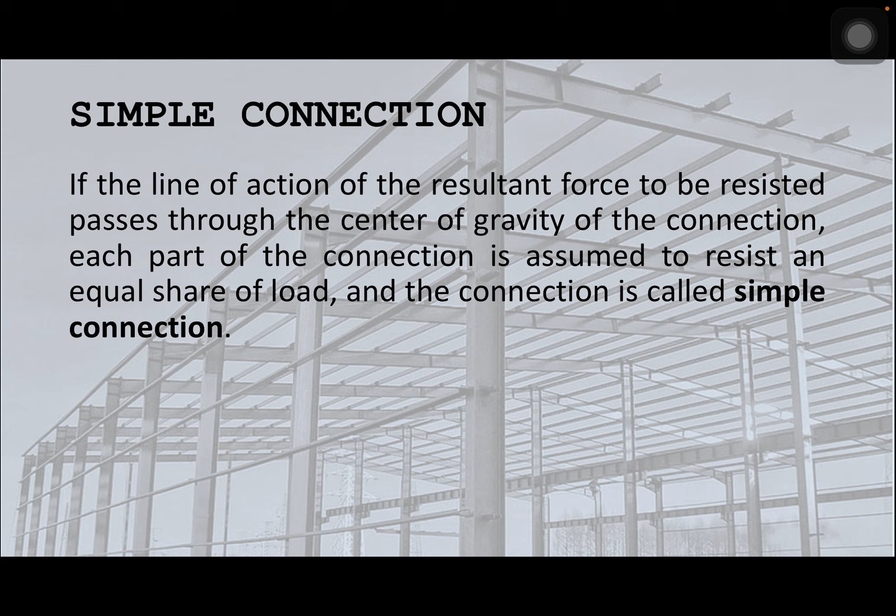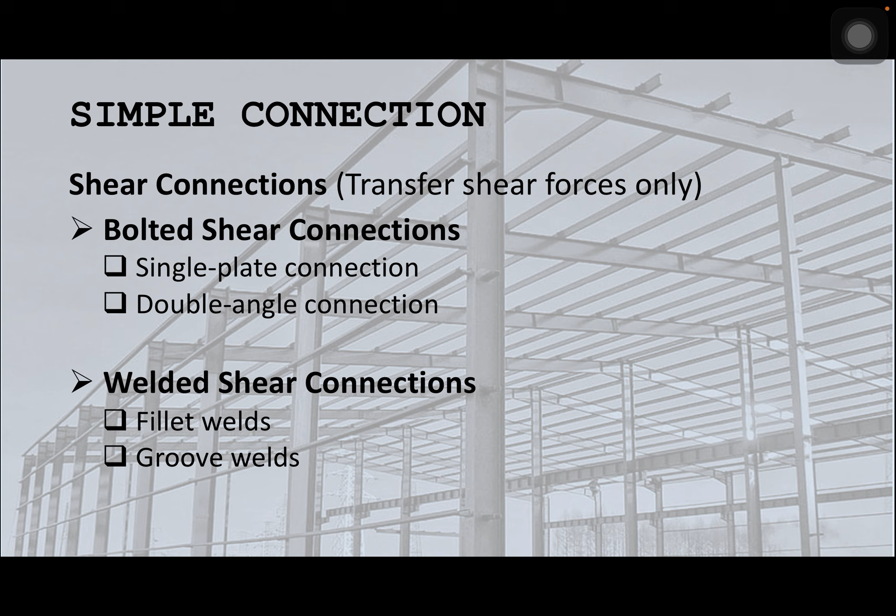Sabi ko nga sa inyo, those connections are the bolted and the welded. For the bolted shear connections, we have the single plate connection. We also have the double angle connection. Then for the welded shear connections, we have the fillet welds and then the groove welds. So ano ba yung tinatawag natin ngayong welding? Welding is a permanent method of joining steel members by melting and fusing them together using heat.

Unlike bolted connections, welded joints eliminate the need for bolts and plates, providing continuous load transfer and high strength. So ito yung common na ginagamit natin for connecting structural steel materials.

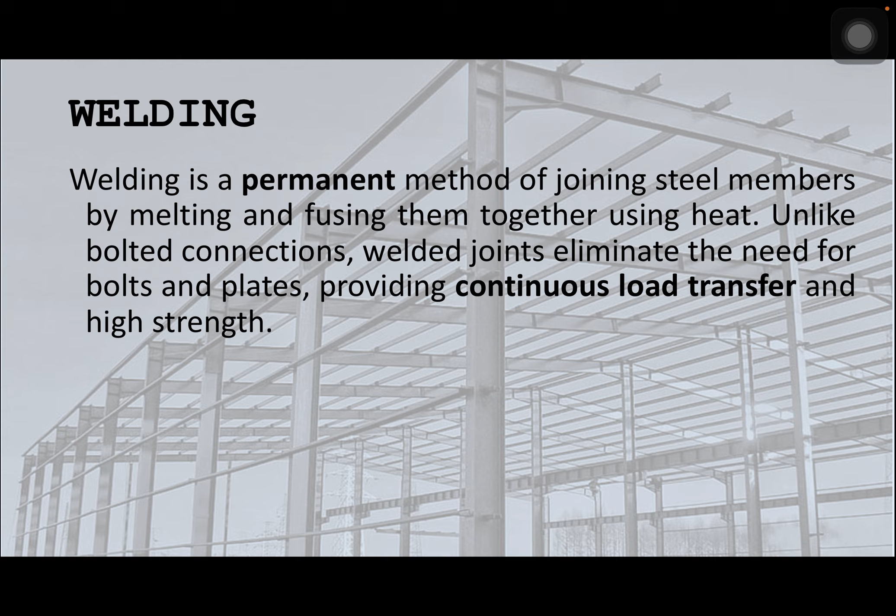So what are the welding processes? We have different kinds of welding process. The first one is the SMAW or the shielded metal arc welding. This is also known as stick welding. This is one of the most commonly used welding processes for structural steel, and it uses flux-coated electrode that melts to form the weld while the flux creates a protective shield against atmospheric contamination.

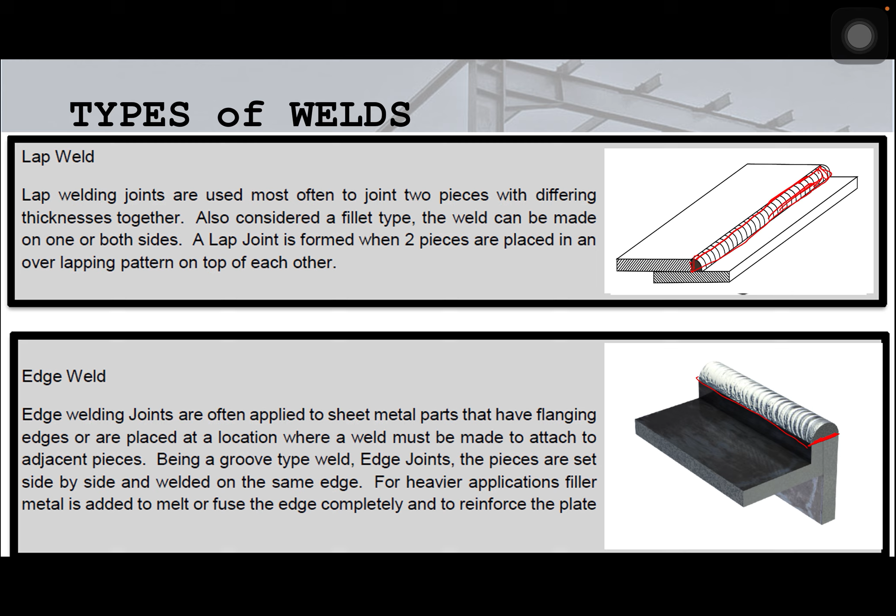Okay, so now, let us talk about the fillet weld. So, the fillet weld is the type of weld used to join two metal pieces at a 90-degree or other angle. So, most of the time, 90-degree naman talaga. Gusto kasi natin gumawa ng nakatayo.

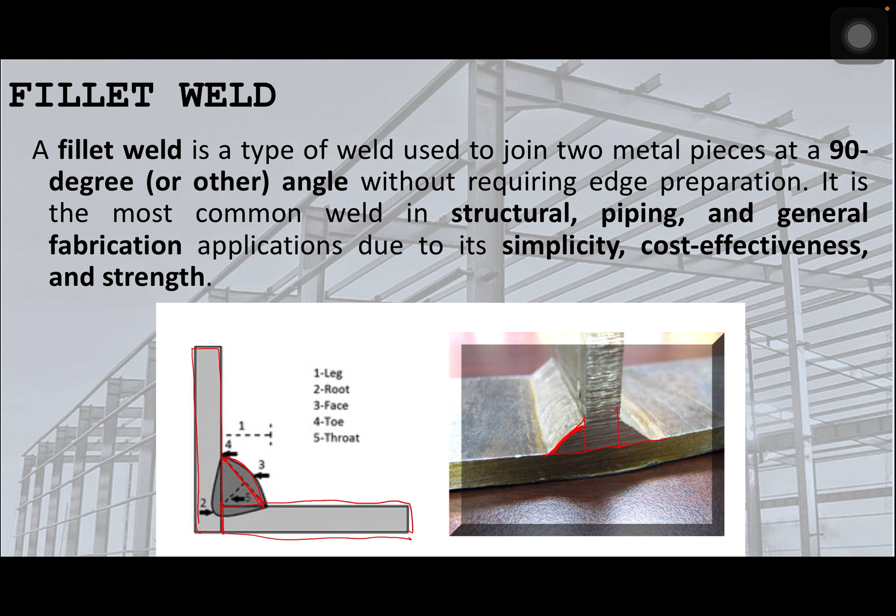So, we have the stress in fillet weld using the same formula of P over A. Okay? P over A pa rin siya na force over the area. But take note, ng area natin, we are talking about the fillet weld. Okay? So, ibig sabihin, ito lang yung pag-uusapan natin, yung mismong fillet. Okay? So, ano yung area niyan? Siyempre, hindi natin alam, di ba?

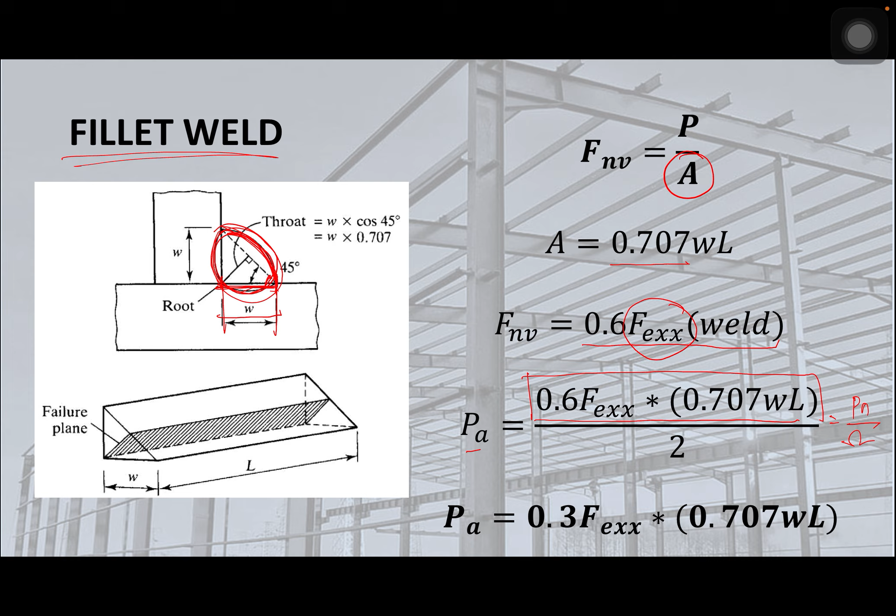Okay? So, yun lang naman din. But, take note that W is the weld size or the weld thickness, L is the length of the weld, T is the throat of the weld, Fnv, same pa din tayo. So that is the weld shear strength. FEXX is the weld ultimate tensile strength.

And actually, si ultimate tensile strength, pag hindi binibigay, meron naman tayong pwedeng pagbasihan. If your weld is E60XX, yung 60 kasi na yan, that is the KSI, okay, in English. But if we convert that into SI, that is equal to 415 megapascal. For E70XX naman, that is 70 KSI, equivalent to 485 megapascals.

E80XX is 80 KSI, and that is equivalent to 550 megapascals. But take note again, na ito po ay kapag lang hindi given. Okay? Kapag hindi given, ito gagamitin ninyo. Pag given naman, kung ano given, yun gagamitin.

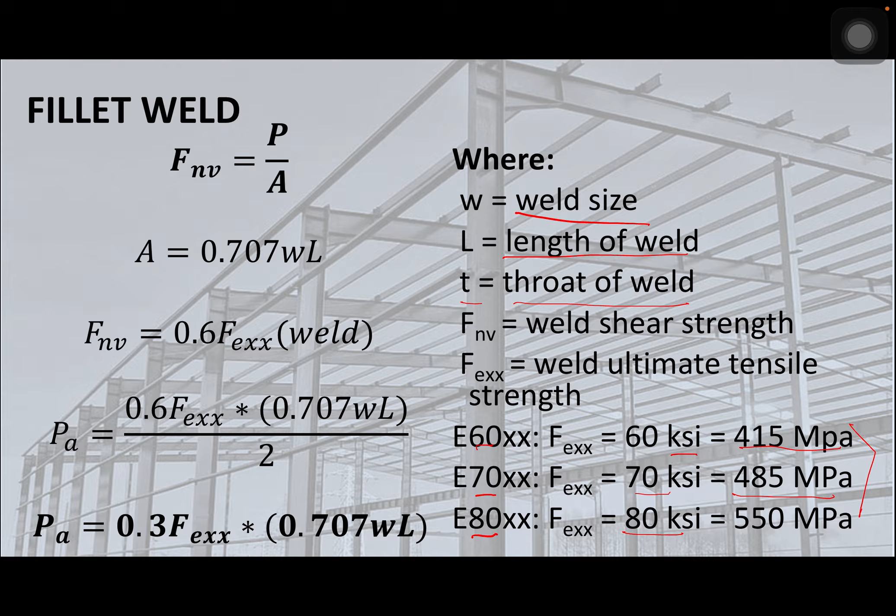Hindi yun pwede na habang kumakapal yung welding natin ay yun na yung mas okay. So we still have to get the maximum size, may permit lang din kasi tayo. So the material less than 6 mm thick, that should be not greater than the thickness of the material. So ibig sabihin, kung yung material mo is 5 mm, dapat ang thickness mo din ng weld should be 5 mm. Yan na yung kanyang maximum.

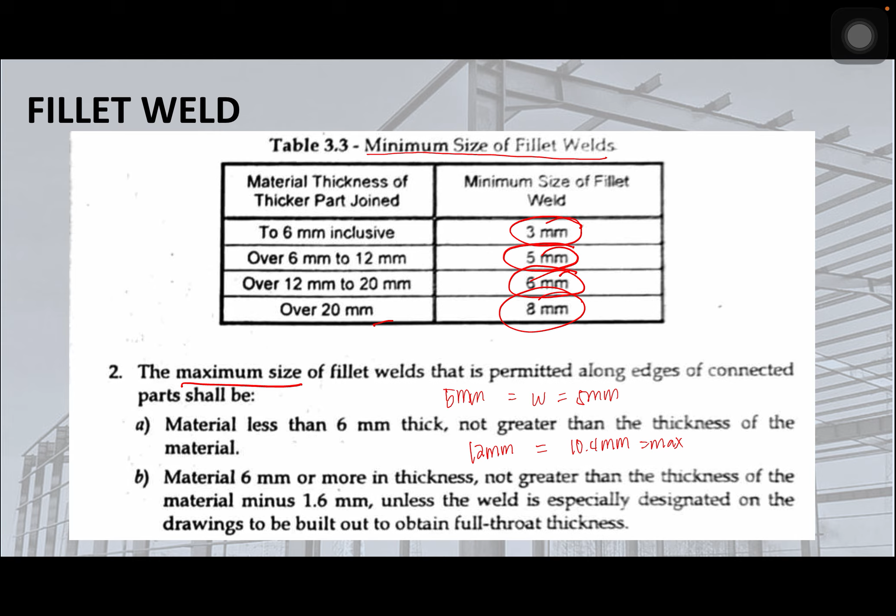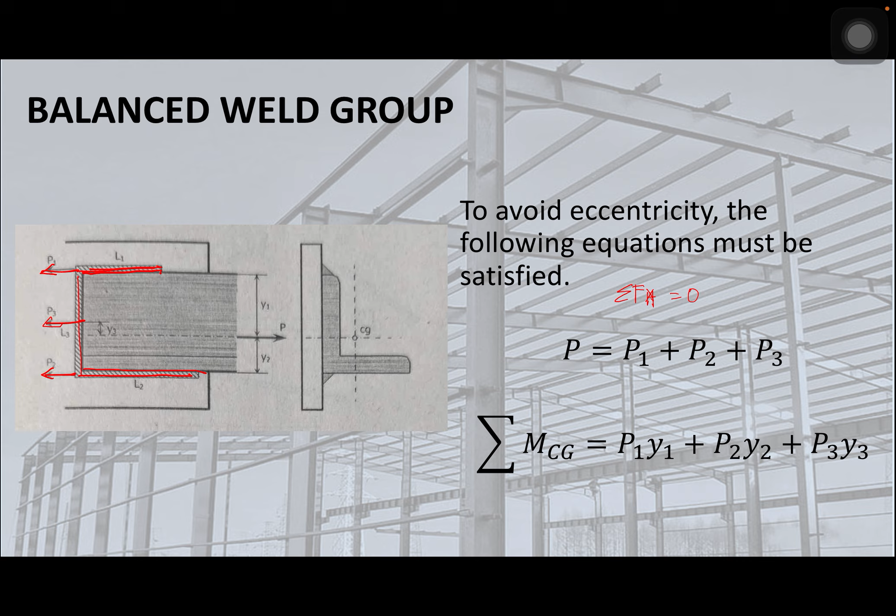The same formula from statics. Ang gagawin lang natin is the equilibrium. So, that is just summation of forces horizontal is equal to 0. So, makukuha lang natin na P is equal to P1 plus P2 plus P3. Ma'am, saan nakuha si P1, P2 at P3? Take note na meron kang tension para sa isang length mo, may tension ka para sa panibagong length mo, at meron ka ulit tension sa isa pang length. So, gagamitin lang din natin yung konsepto ng statics.

Now, what is base metal shear? For the base metal shear, this refers to the shear failure occurring in the parent or the base metal itself, not in the weld. So, ibig sabihin nito ay nagkakaroon ka ng shear dito sa base metal kung ang failure mo is nandun sa mismong base mo. Hindi siya nagkaroon ng sira dahil lang sa weld.

So this happens when applied shear force exceeds the base material shear strength or 0.4 Fy. It is a critical failure mode in welded joints, especially when the base metal is weaker than the weld. Then weld metal shear. The weld metal may fail before the base metal if it has lower shear strength or poor weld quality. So, pag hindi mo nasunod kung ano yung mga nakalagay sa code natin, possible na si weld naman yung magkaroon ng shearing.

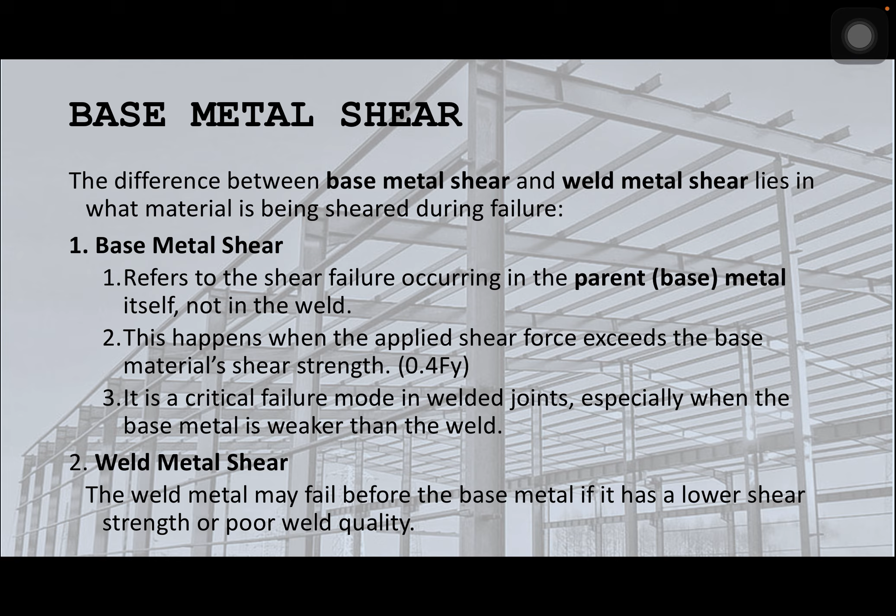Okay, so let us move now to the sample problems and that will be on the next part.